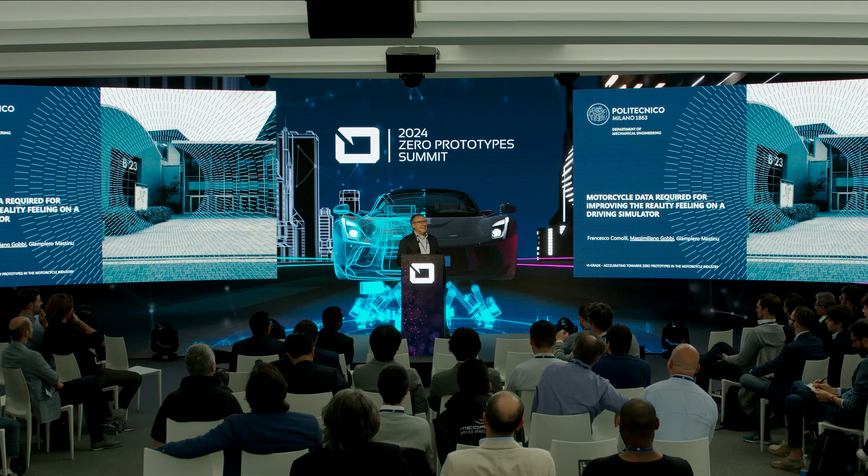Okay, thank you. I'm not Francesco Comolli. I'm older, but Francesco is here for the complaints. So,

First of all, I will start describing this activity. Actually, I'm going to take a step back, let's say, with respect to what we have seen this morning. We have seen new driving simulators. We have seen simulation models, very refined models. The content of this presentation mainly refers to analyzing the motorcycle dynamic behavior in order to enhance as much as possible the reality feel that will be perceived by driving simulator users.

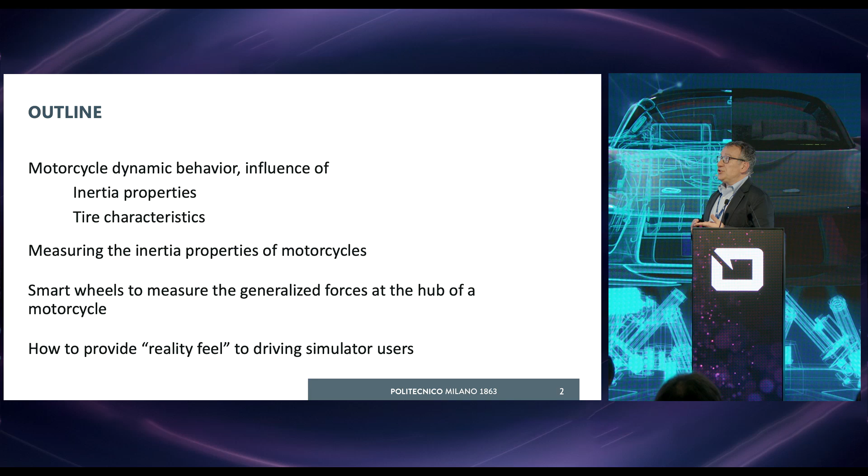Which are the main parameters of the motorcycle that affect the dynamic behavior? Inertia properties and tire characteristics. We already saw some works referring to this. So I will show you some systems that we are currently using for measuring inertia properties and to properly characterize the tire behavior.

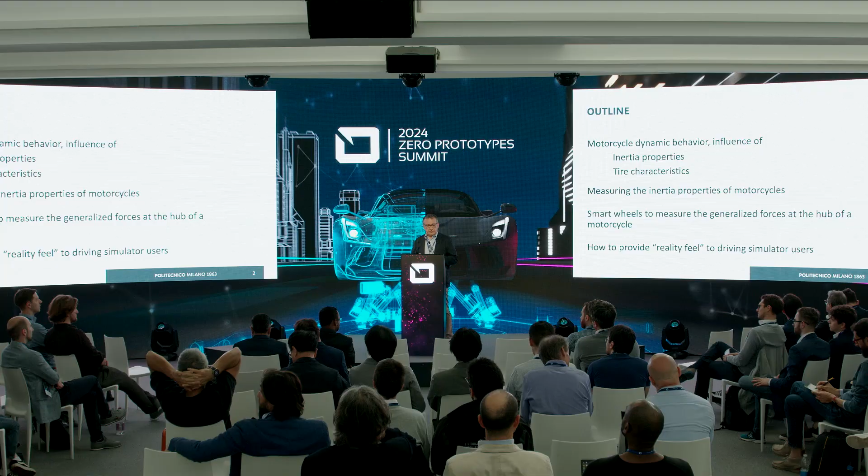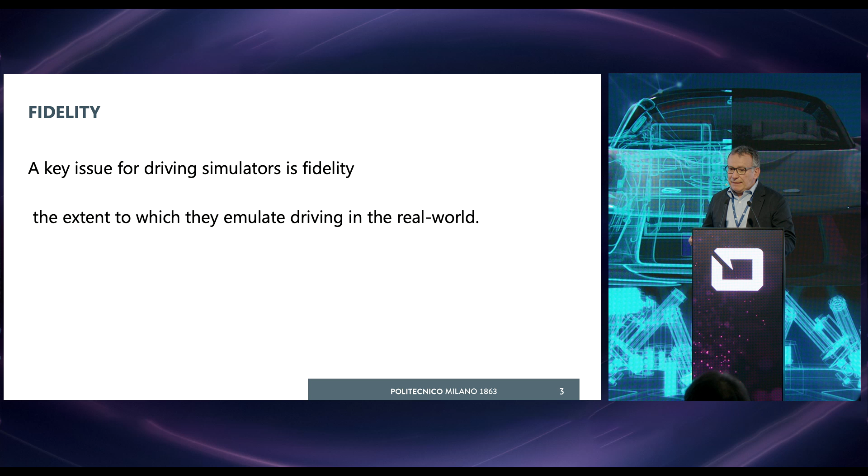The focus will be in the near future to develop a driving simulator for motorbikes. And obviously, one key issue is fidelity. So be as close as possible to the real-world driving, which is even more difficult for motorbikes. My step back will be described in a few seconds.

Let's refer to a very general driving simulation flowchart in terms of motion control. I have my driver, I have my vehicle model, I have the external environment, I compute the motion of the vehicle, then I have all the cueing which is necessary, and then a simulator motion control in which I have usually an MPC control in which I have a feed-forward and a feedback correction.

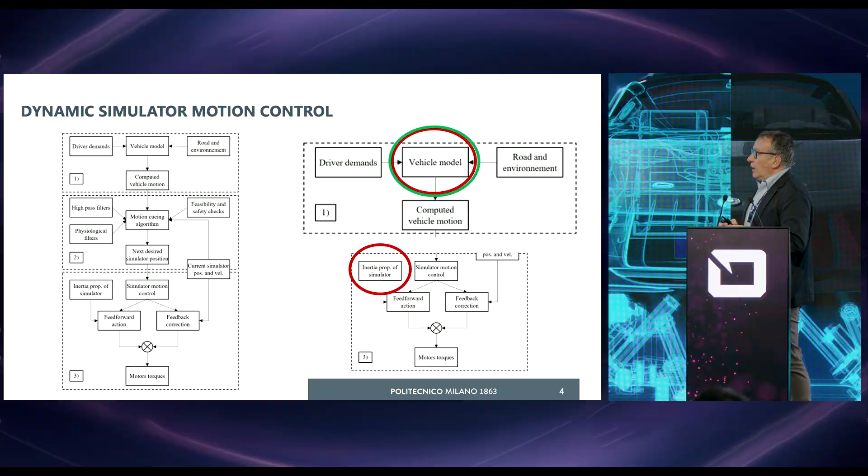Obviously, some information related to the motorbike that I'm going to include into this system will affect the performance of the simulator itself too. So there are two main aspects. The first one refers to the vehicle modeling, which is probably the most important one up to now. But when the driving simulator the colleagues showed us some very interesting results of at the beginning of this morning will be available, also the inertia property of what is actually on the simulator will be particularly relevant.

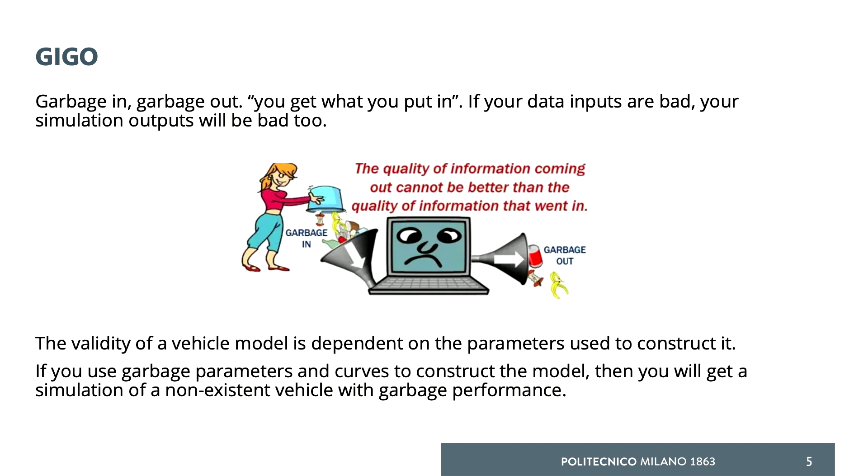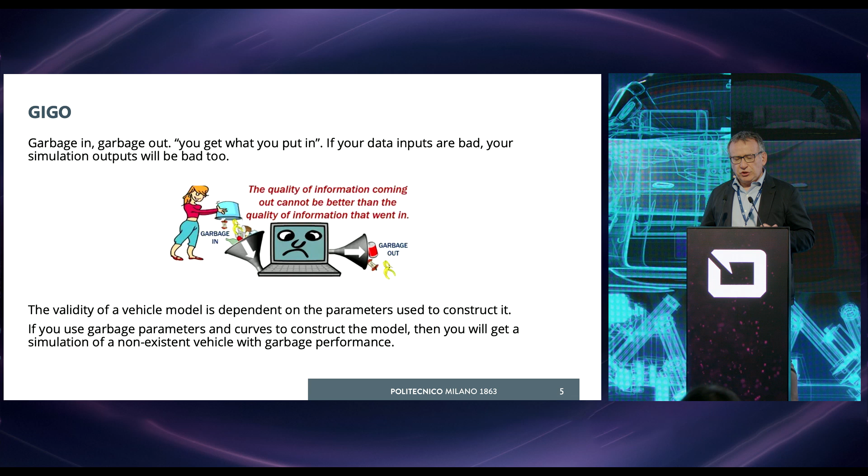Let's start with the modeling of the vehicle, the dynamic model. This is a slide that I use for my courses. We always have to remember that your model is not able to create information. It's able just to synthesize what you are providing to the model as data, okay? Parameters of the vehicle, tire force characteristics, and so on. So this garbage in, garbage out has always to be kept in mind while performing a simulation or while developing your driving simulator environment.

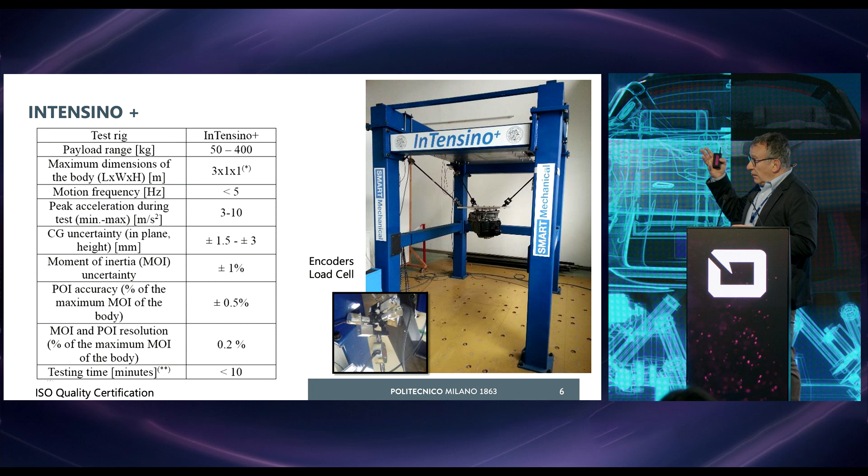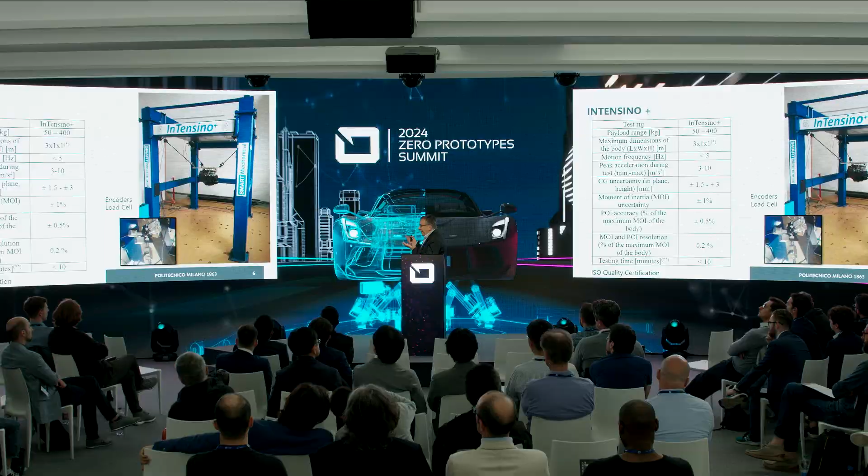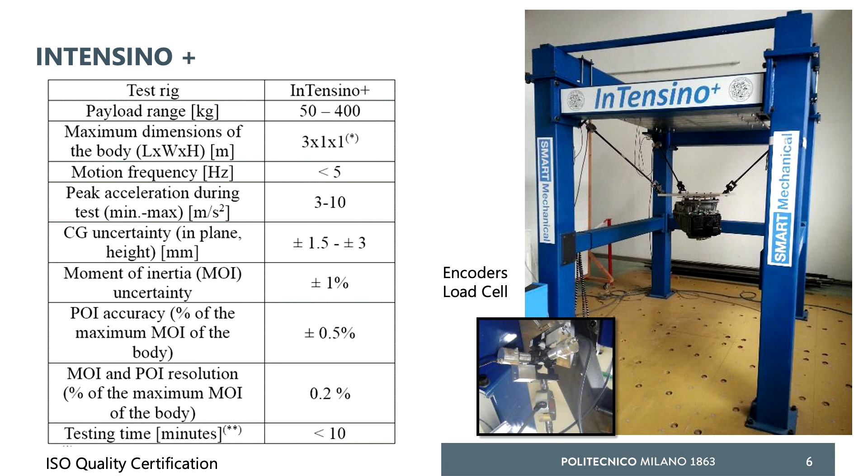This and the next slide will summarize some of the performance. I will try to make you understand if this level of accuracy is enough, fully satisfying or not for what we are looking for. The system is shown here. You see it's a quite simple hardware in which we have these 3 bars which connect the rigid body that we are considering to an external frame. Each of these 3 bars is instrumented by means of one load cell and 2 encoders. Okay, so it's quite a simple layout.

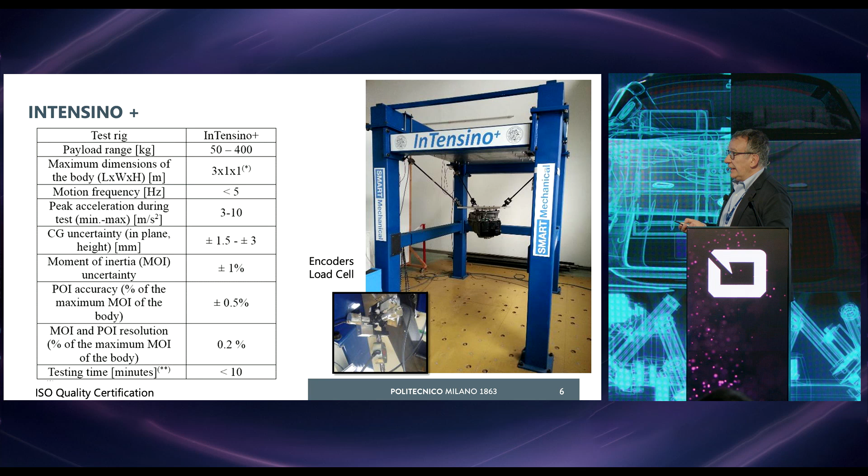Just a few equations before lunch are important. So if I start from the generalized second Newton's law at whichever reference point on this rigid body, I can write the applied force as equal to the mass matrix times the acceleration, the generalized acceleration. This mass matrix depends obviously on the mass of the body, on the location of the center of gravity, and on the full inertia tensor.

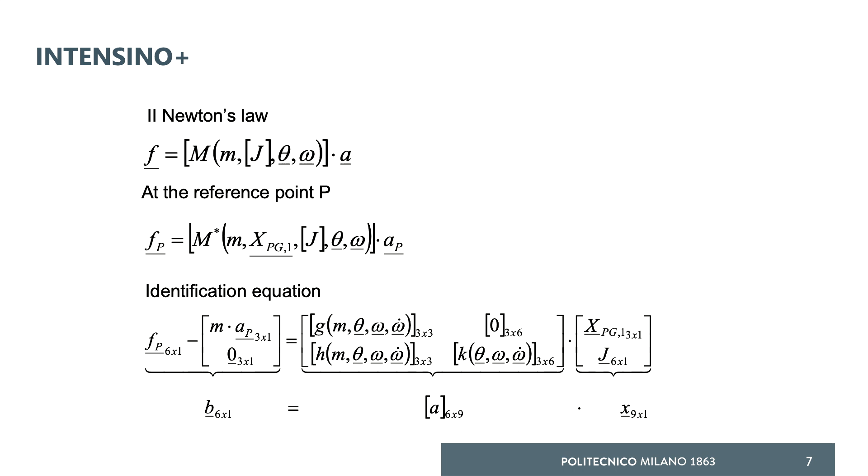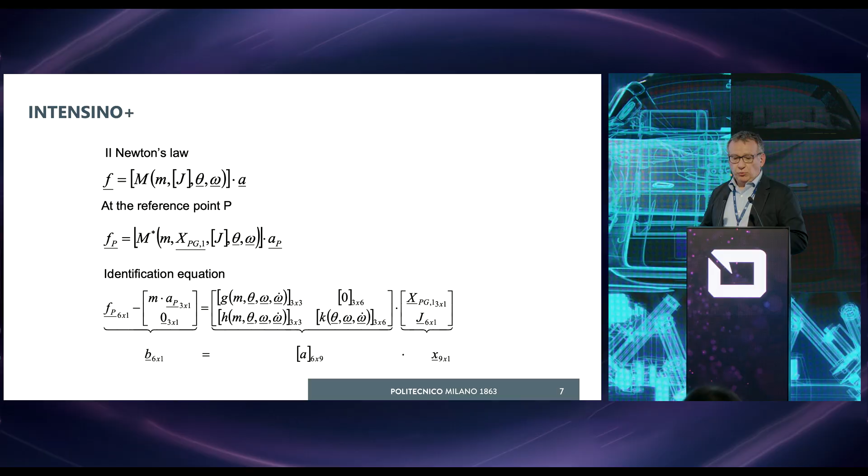I can rearrange this equation into this identification equation that is shown below, in which you see for each time instant, I'm able to write 6 equations. But actually, the unknown parameters are 9. Location of the center of gravity, 3. Then the parameters of the inertia tensor, another 6. Okay? So for sure, I need more time instants at which I perform this identification, and by applying a very simple least square estimation approach, I can identify in just one test both the location of the center of gravity and the full inertia tensor.

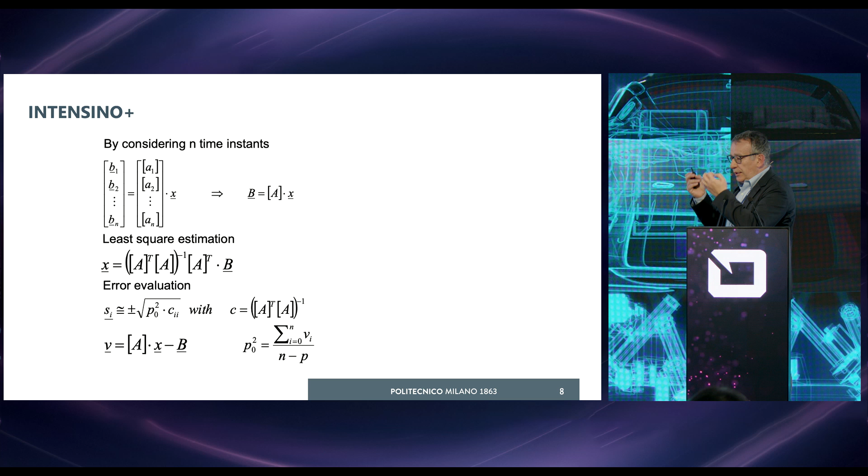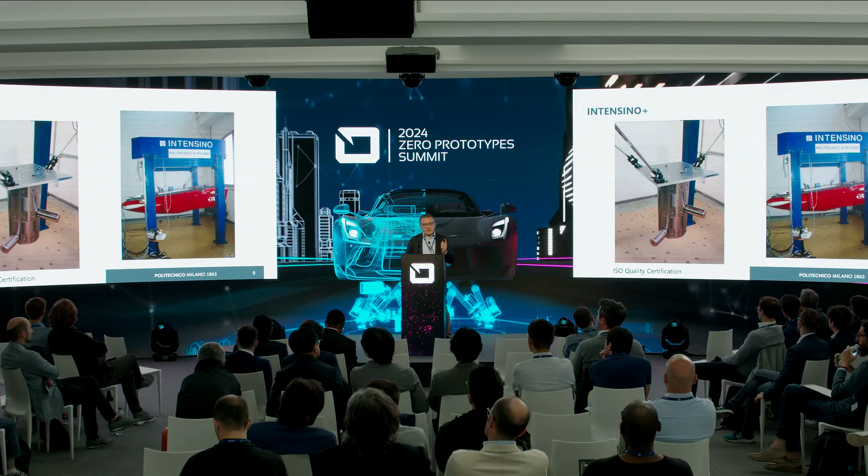Actually, this is not the equation that is actually used in the system. We take into account also the deformability of the components to increase the accuracy of the identification. So the deformability of the carrying frame, of the bars, of the joints, and so on. The system is inside the quality certification process at Politecnico di Milano. So we have a calibration body that can be reconfigured in order to check the quality of the measure that we are performing.

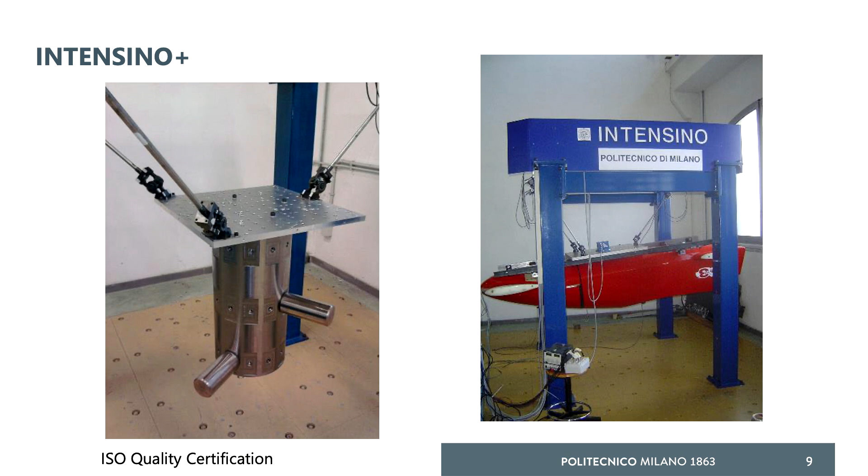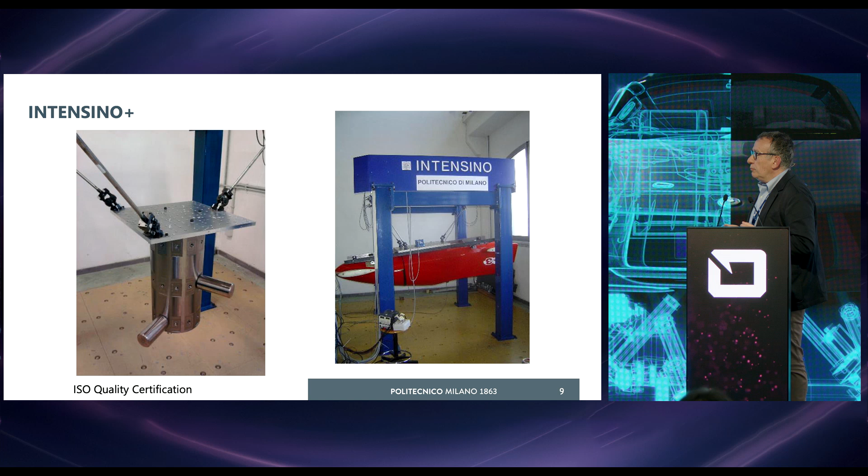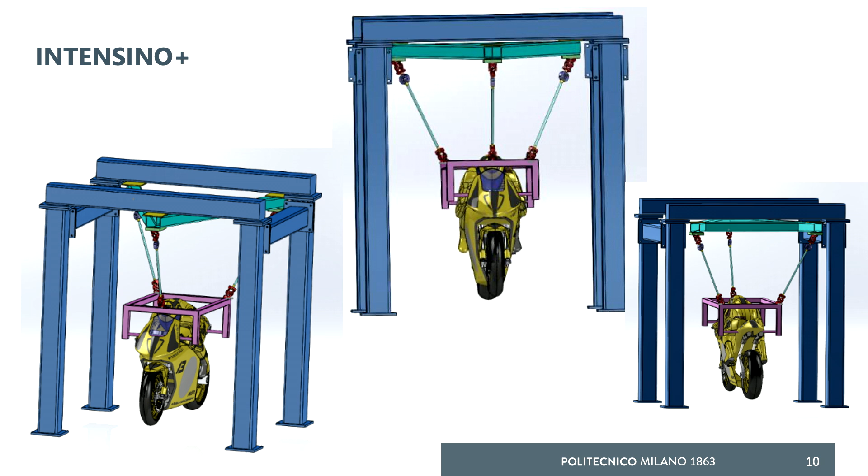It has been used for several different vehicle subsystems, and you see something that is similar to a motorbike, which is this racing sledge that is shown here. Actually, we are thinking of applying the same system to motorbikes. We have enough available room, both in presence of the driver and in absence of the driver. Obviously, the presence of the driver, like we have seen in many presentations, has to be taken into account with different relative positions of the driver and of the motorbike. But the measure actually takes just a few minutes. So performing different tests could be affordable in terms of time and money. So we can think about this.

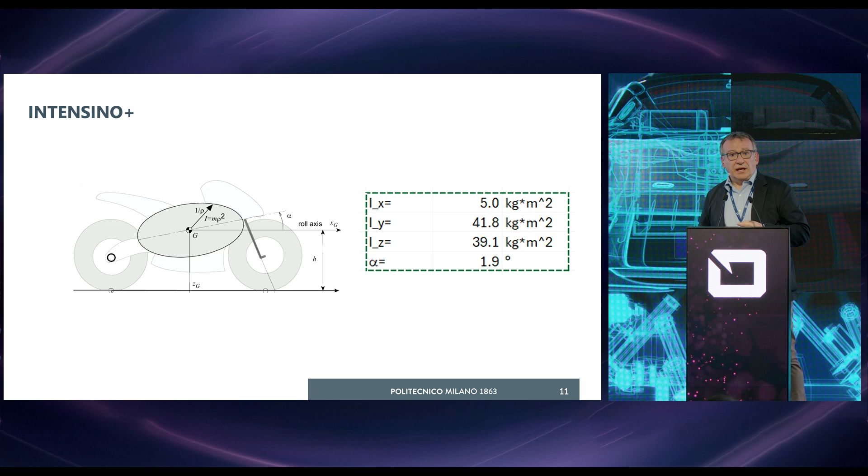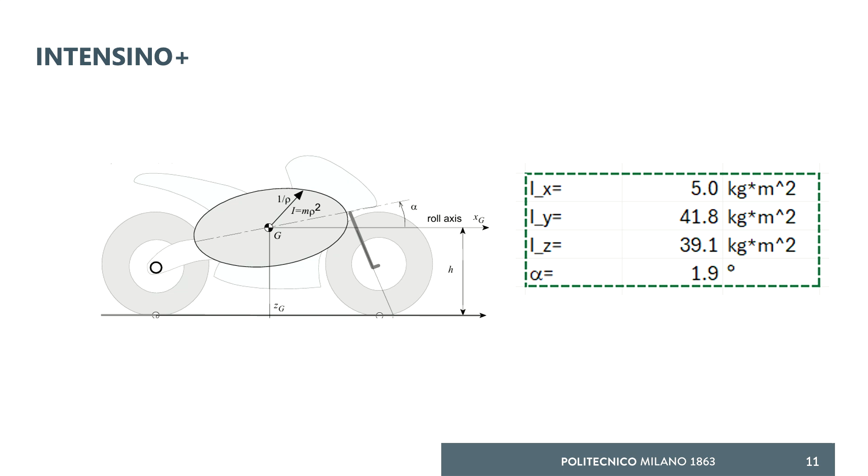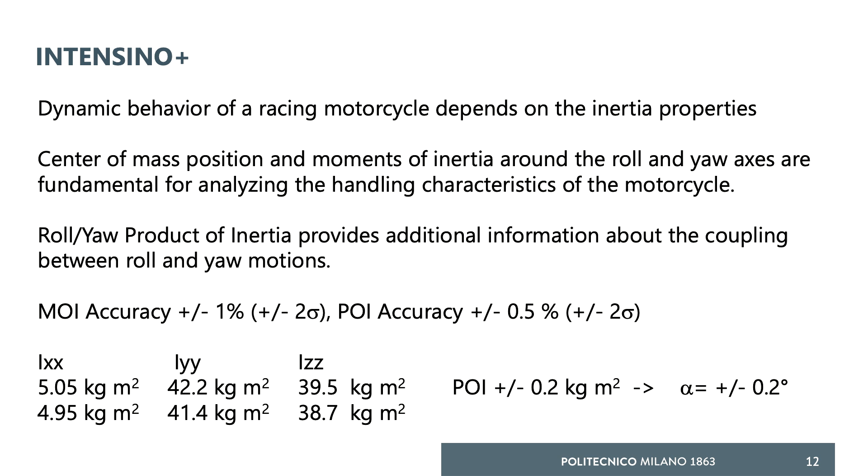Referring to the data of a motorbike, actually this data has been measured by a different system at University of Padova some years ago. And these are reasonable values for an example motorbike. What is important is not only getting the correct value of mass, location of center of gravity, but in particular, roll and yaw moment of inertia, and also very important, the roll-yaw product of inertia for motorbikes. Because the coupling of roll and yaw while performing transient maneuvers is particularly relevant, and it significantly affects the motorbike dynamic behavior.

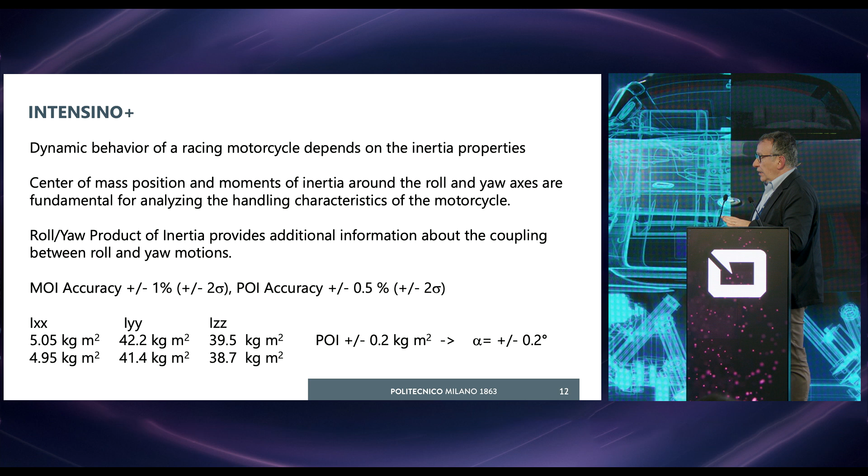Referring to the level of accuracy that I showed in the previous table, so plus or minus 1%, this is plus or minus 2 sigma, so 95% of the samples will be within this range. And for the product of inertia, plus or minus 0.5%, we are able, on this reference vehicle, to get an accuracy on the orientation of the ellipsoid of inertia below 0.2 degrees. That, based on many simulations, is more than enough with respect to what is generally required.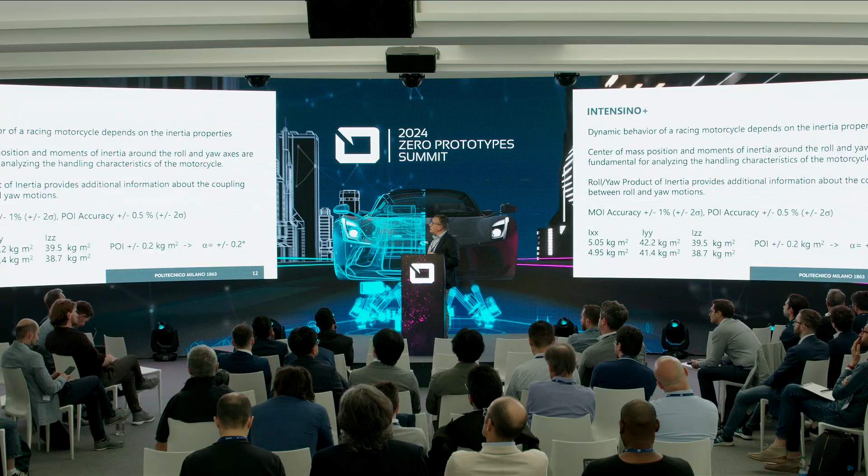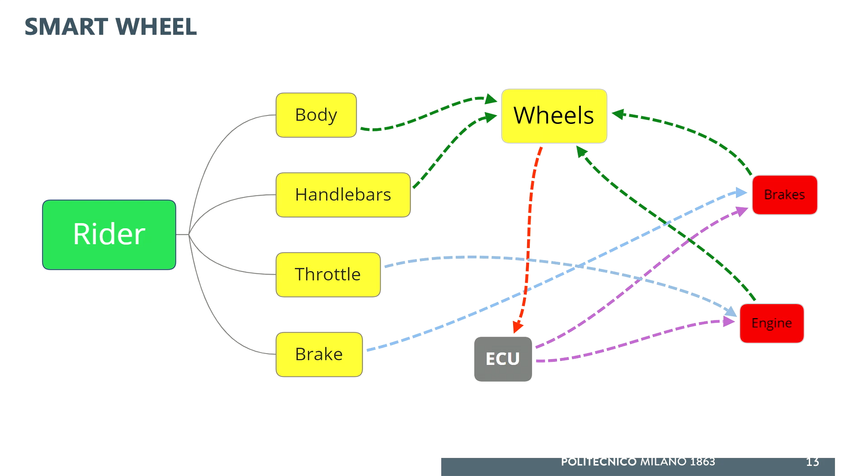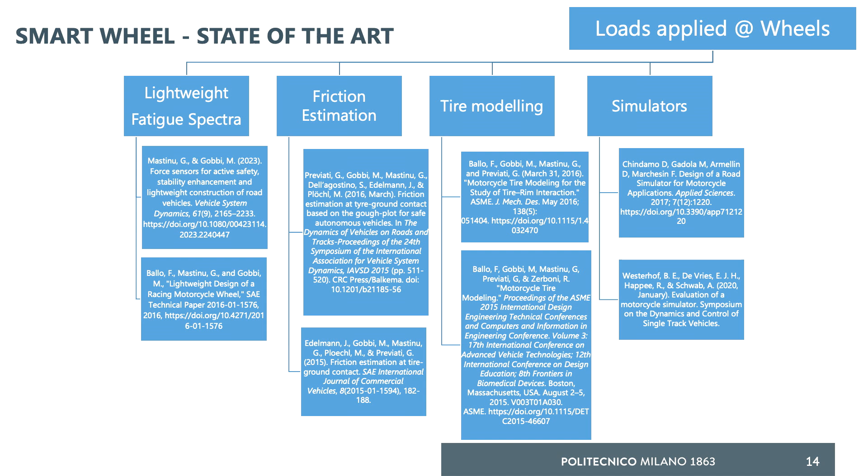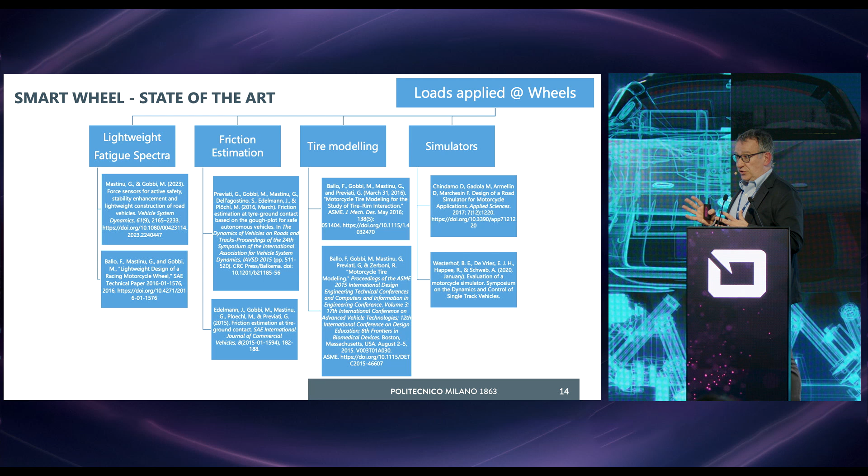Next step, now let's say we are able to measure in an accurate way the inertia properties. Next step, tire characteristics. It's clear to all of you that all the forces except the aerodynamic ones are exchanged between tires and ground. So this information, like many of the previous presenters have already shown, is particularly relevant. For this reason, we developed measuring wheels, we call it smart wheel, that can be used, this is a very synthetic state of the art, for many different applications. Obviously, the simple one is I want to design my motorbike as light as I can, so I need the loading spectra for analyzing the actual behavior of the motorbike, or I need to define a simulation model that is as accurate as I can, which is the focus of what we are considering now.

We measure 6 quantities. From 6 quantities, we have a DSP that in real time is able to filter the signals and compute the actual forces in the proper reference frame, correct the effect of thermal drifts, and so on. This is transmitted wireless to a receiver on the motorbike. The receiver on the motorbike transmits this information to the CAN network of the motorbike itself. So this information is really available to the actual user of the motorbike.

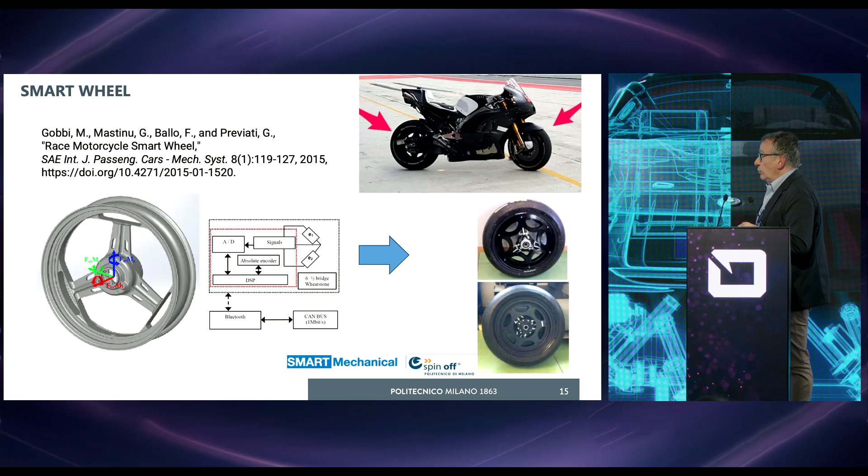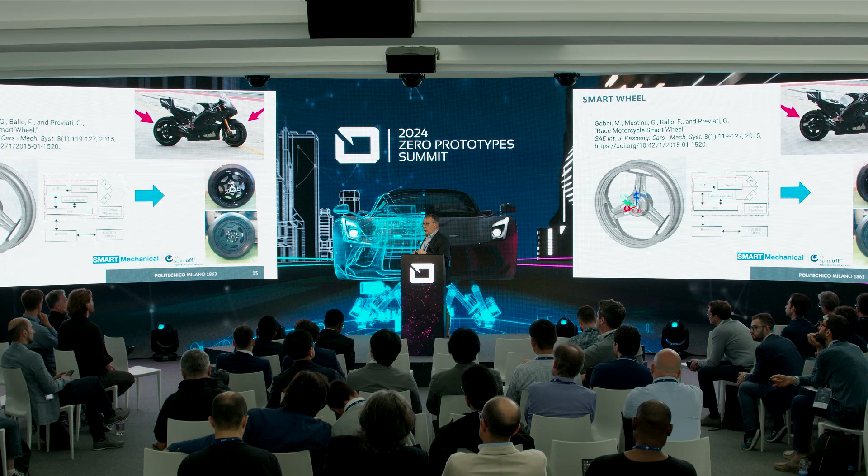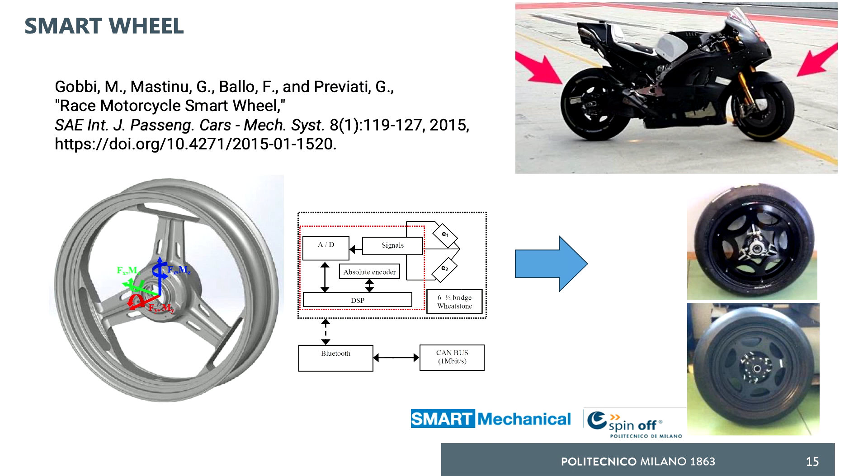Actually, we are transmitting this information at 200 hertz per channel, which is more than enough for all the racing and not racing applications. You see the two wheels installed on a motorbike over there. You can find some details in many papers. Obviously, also in this case, the accuracy level that we required is relevant.

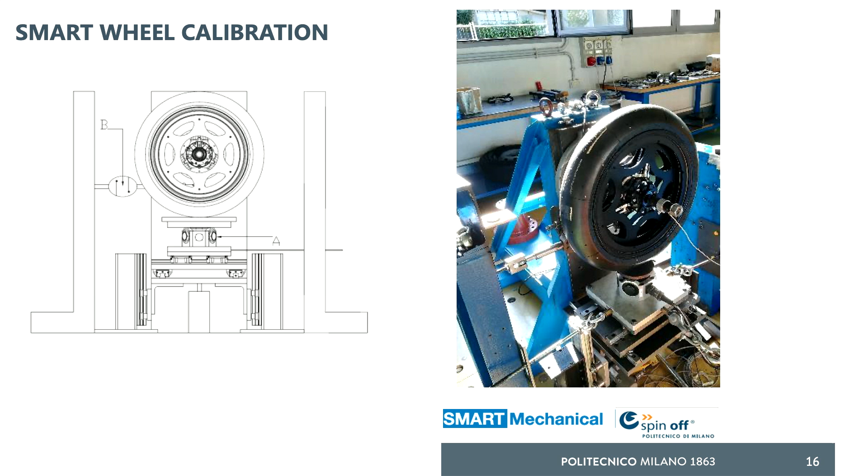You see this is a static calibration test rig that we are using in our lab for performing the static calibration by applying a large combination of loading conditions, because, I have not yet emphasized, also the crosstalk has to be as low as we can. 1-2% is a reasonable target value. These are some data that we obtain in calibration. Remember, it's a 6-component system, so all the actions are applied at the same time, okay? And obtaining such good quality is not so easy.

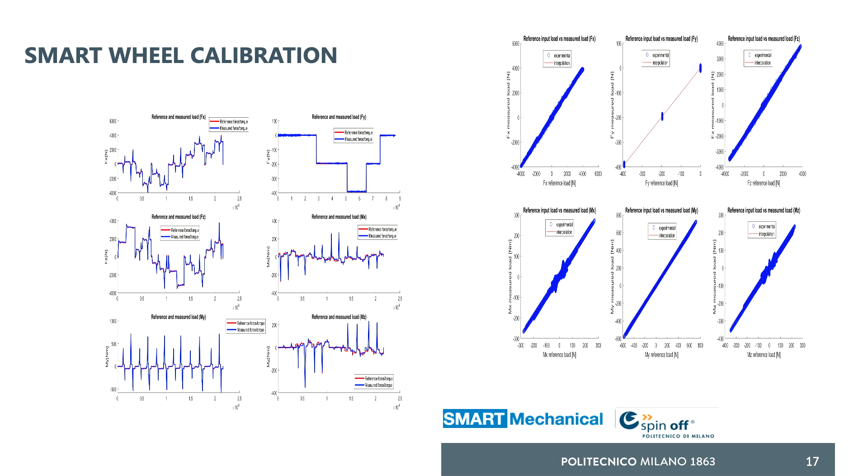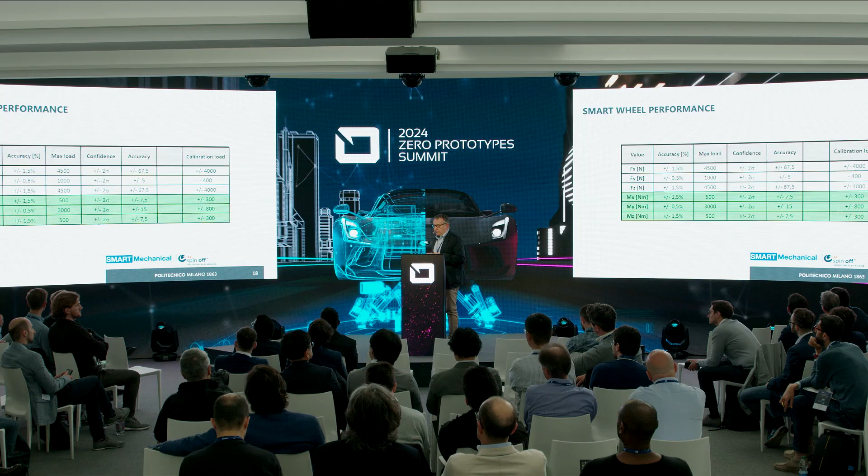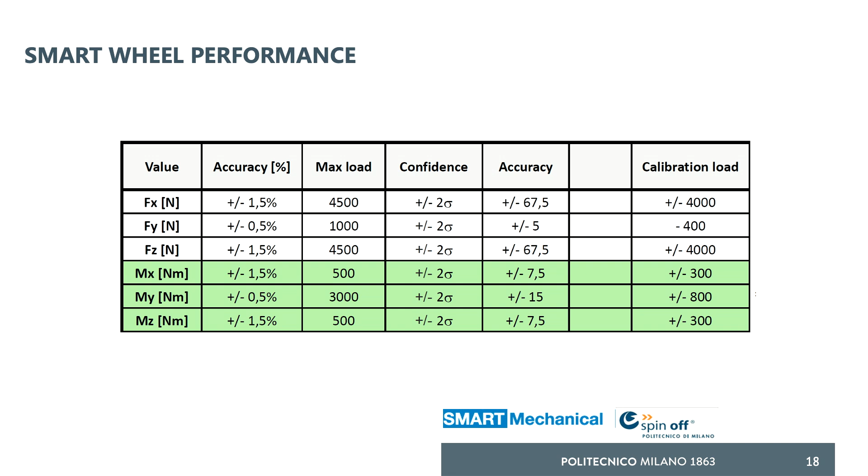I want to emphasize this patented three-spoke structure allows it to be not particularly sensitive to thermal deformation of the channel of the wheel itself, okay? Because it's a quasi-isostatic solution. This is a summary of the performance level that we can obtain on the forces. You see plus or minus 1.5 or 0.5%, and more or less the same, always 95% of the samples within this range for this specified loading situation.

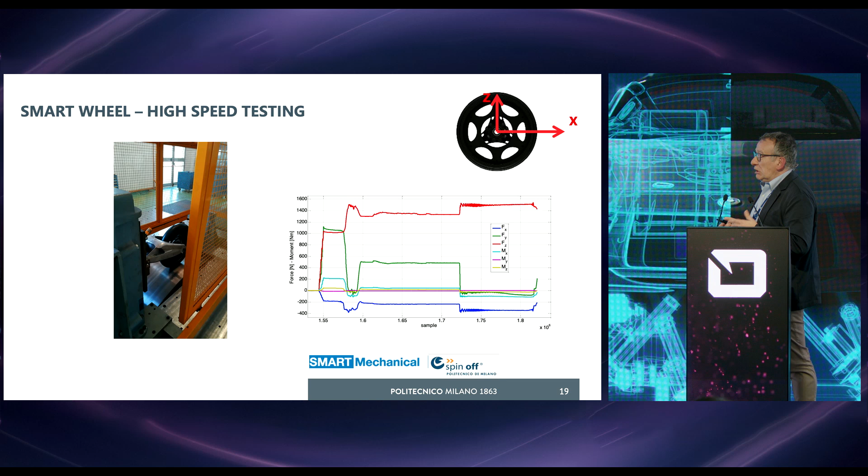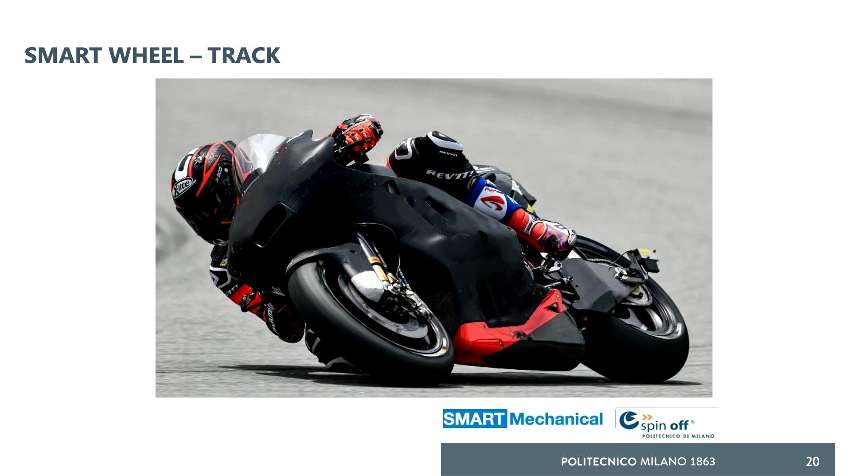Okay. Then we perform also a dynamic verification on a specific rig that we have in the lab, and also in this case we have good results. And the final test, obviously, is on the motorbike, okay, in which the data are used, like Professor Faroni was saying before, in order to characterize in the proper way the tire behavior in the real scenario of the specific track that we are considering.

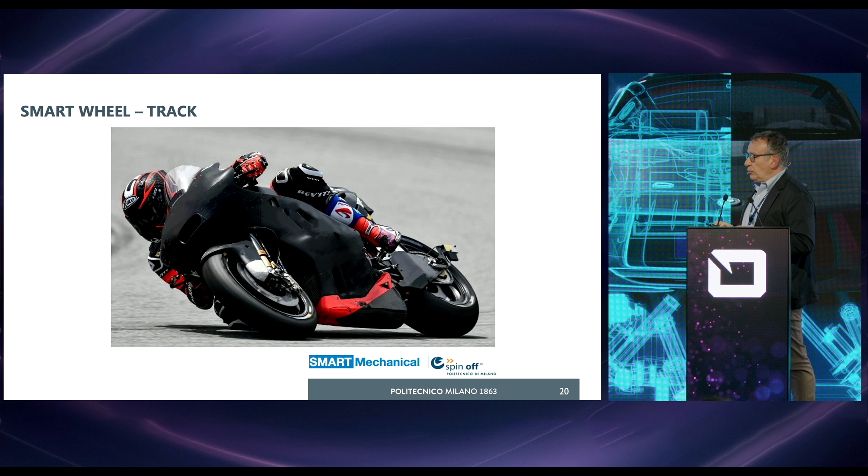I get to a conclusion because I'm running short of time. So, inertia properties and tire characteristics are of paramount importance for describing properly the dynamic behavior of motorcycles. On the basis of simulations and literature review, we can say that we need a level of accuracy for tire forces lower than 2% on both forces and moments. Okay, there is a shift, horizontal shift.

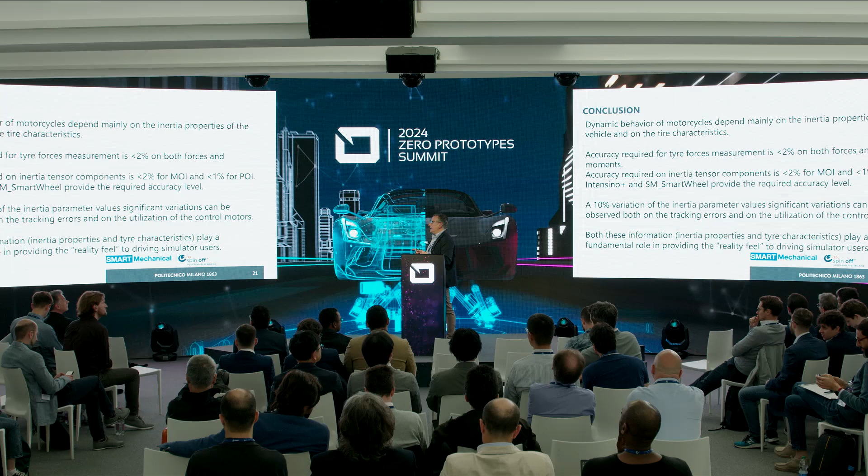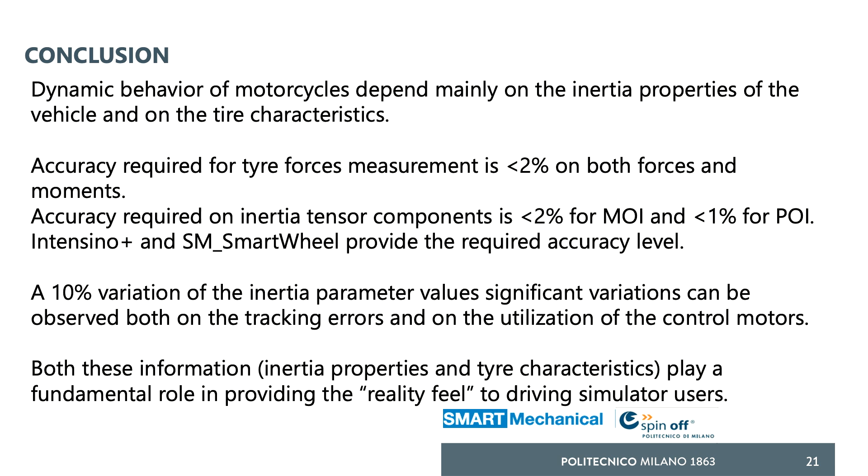Also, in terms of inertia tensor components, 2% of the moment of inertia is enough, but we need a very high accuracy on the product of inertia, because again, for motorbikes, the orientation of the inertia ellipsoid is really important. We have the system able to obtain this level of accuracy.

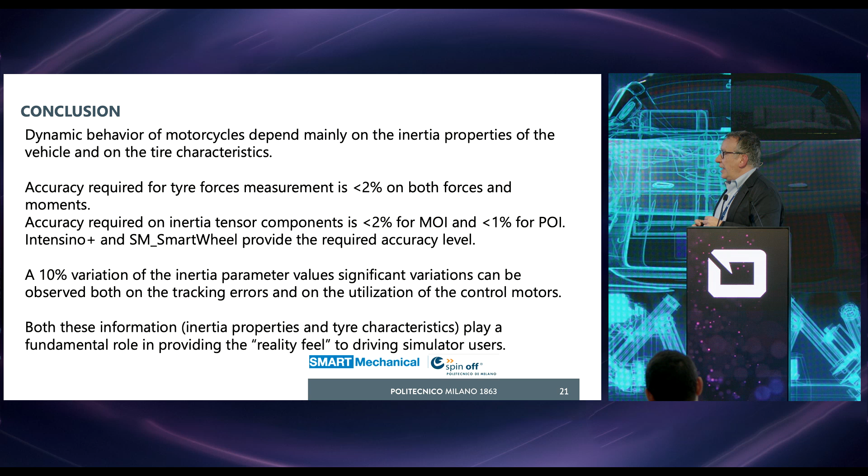Step forward, thinking of what we are putting on the platform of our driving simulator in order to achieve low tracking error and reduce the power and the torque required of the control motors, we need to have a measure with an error less than 10%, okay, always to give you an order of magnitude. This level of accuracy will allow us to obtain simulations and driving simulators able to provide the required reality feeling. That's it.